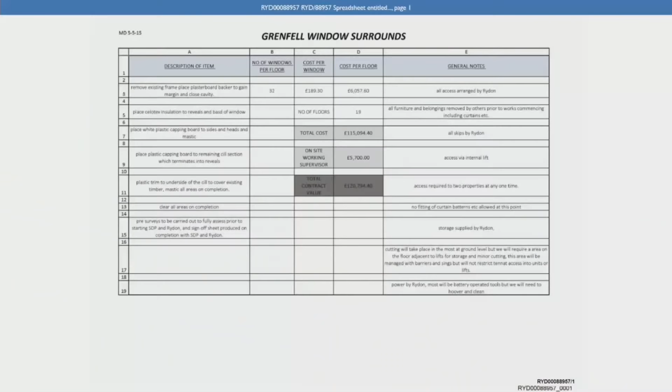Yeah, and we can see on the left-hand side, there's a column for description of item. And if we look, the first item is remove existing frame. So is that remove the existing wooden window frame?

I think it was the inner frames. I think, if I remember rightly, the windows were built out as you had an outer aluminium frame, and inside of that were two other windows that sit in there. So you kind of dismantle the frame. Right, so I think, to my recollection, that part of the frame still remained. It was fixed in place, and that gave us something to actually fit the board up against the new window frame and the old window frame.

Yeah, I see. So it says there, remove existing frame, place plasterboard backer to gain margin. So what's that bit? At that point in time, this was when this was done. So this is 5th of May. Yeah, when this was done, I'm saying to them, I need the flexibility just in case I've got a different scenario. So I might cut pieces of plasterboard in to bridge the gap and put it on that, or we may go back to the insulation.

So I think that just gave me the flexibility to do one or the other.

I see. So you've written in that top box, place plasterboard backer to gain margin and close cavity. And then in the row below, row 5, you've got place Celotex insulation to reveals, and should that be base of window? It should be, yes.

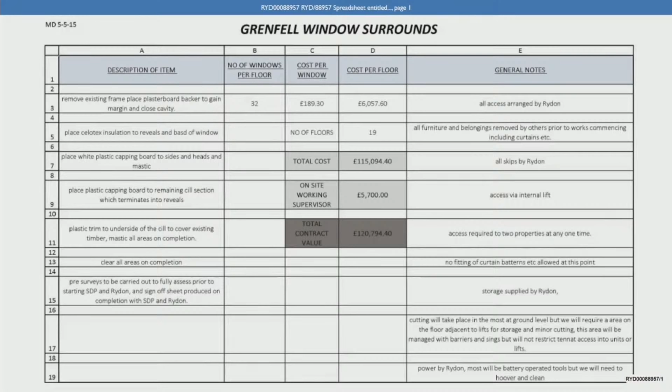So are you saying that what you were proposing in this quote was either one of those options, either plasterboard or Celotex, or are you saying that it was both? No, I think it gave me the flexibility to move in and about either one of those options. As it was then, we didn't use the plasterboard at all.

And the original sample never used the plasterboard. And I think actually in my statement that was offered as well, it's highlighted in there that comment there should have been taken out of the second quote. Yes, I was going to come to that later. Yep, so I understand that.

But just thinking back to when you put this quote together, were you contemplating that you might use plasterboard backer and some Celotex insulation, or a combination of both? Yeah, yeah, yeah.

And we can see you've placed Celotex insulation there. What Celotex insulation did you have in mind when you wrote this? It was no more than a 25mm Celotex. It was more to do with the thickness. We only had a very small margin to work with to actually be able to place something in there.

And it was there, the Celotex was there, because it could be put under compression, but it could also act as a support, as well as giving some sort of thermal benefit as well.

I see, yeah. So would there have been a particular Celotex product that had the right thickness that you had in mind? The 25mm, yes. I think it's a TP10, or it was a very basic one. Its criteria was nothing more than for us to have a backing into the board to stop this bowing.

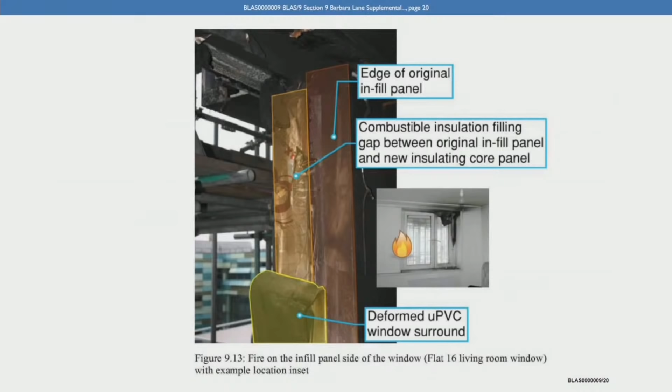It's got red branding on it, and you can just see the end of the Celotex there. That insulation has been used to fill the gap between the original window infill panel and the new window infill panel. Do you see that there? It's there to provide support to the plastic. And we can see that what's at the bottom in yellow is a deformed UPVC window surround, which has just peeled back and melted and fallen away, showing the board behind. Is that correct? Yes. And that was work that your operatives did on site, wasn't it? It was, yes.

We can see another picture of this if we go to Mr. Hyett's Phase 2 report. This is PHYR0000029 at page 20, and I want to look at figures 4.11 and 4.12. So I think we're looking at the other side of that window arrangement, back down towards where the window infill panels are. We can see the new white window infill panel, can't we, in that gap? Do you see that there?

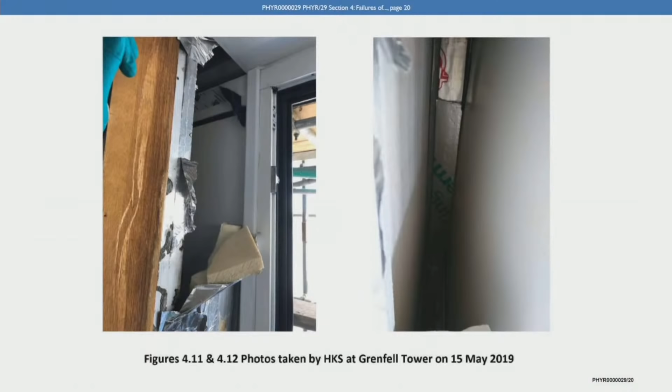And we can see that here some of the insulation and its foil facer has fallen away. And then if we look on the right-hand picture, is it right that here we can see an example of Celotex and Kingspan being used in the same location? Is that correct? Yes. Because we've got the Thermapitch, the Kingspan Thermapitch on the bottom with the green, and the Celotex on the top with the red. And you're looking at the rear of that. Yep. And again, that's work that your operatives would have done to put those boards in place.

And were they under compression when they were going in at that location on the sides of the windows? Do you cut the insulation so it's too big and then squeeze it into that gap? Yeah, it doesn't have to be precise because it will as long as it's got connection at some point. Originally, it could have been that we didn't fill the whole of that, we just used blocks of it to support it. But it was easier to put this in, and also it actually assisted with the thermal performance.

And is it right that the insulation was stuck to the underside of the UPVC? Was there an adhesive used? The UPVC was stuck to the insulation, yes. So on site, you'd put the adhesive onto the UPVC, would you, and then put it in? And it would just stick to the boards? Yes. Yeah, that's helpful. Let's look at the window head next.

If we can go to BLAS0000009 at page 6, and I want to look at figure 9.3.

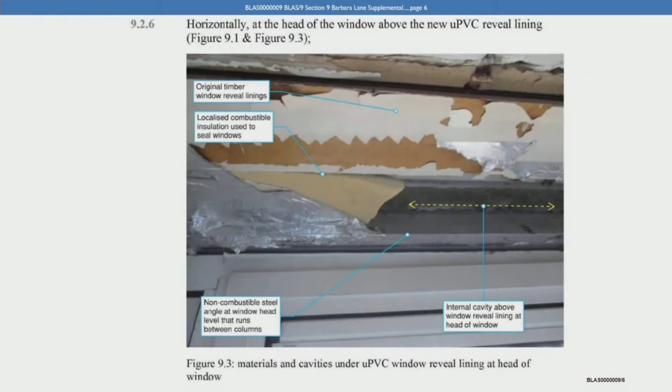So if we can zoom in there. I think what we're seeing here at the top of the page is the original timber window reveal linings, which were left in place. Is that correct? Yep. And then because the windows have been moved out, we've then got a gap at the head. And it's in that location, is that right, that the insulation has been compressed and pushed into that gap to support the rear of the plastic board? Yeah. So the gap didn't go all the way across. You had some support from the original timber window reveals.

Correct, yeah, but you had gaps beyond that. Which means, and where this came about, was the fact that on the lower sill section, if you didn't try and fill in the back with some rigid material, you were going to be able to push them down, and that was the concern. And just to be absolutely clear, that was work at the head of the window that SD Plastering did, yes? Yes, because it also shows the steel angle above, which appeared above and below the windows, which was fitted by Harley. And Dr. Lane has helpfully labelled that non-combustible steel angle at the window head that runs all the way along. Is that correct? It certainly looks that way.

And then let's look at, staying with the jamb, I think, if we can look at another Dr. Lane photograph. This is BLAS0000009 at page 13, and I want to look at figure 9.9. Now here, am I right that what we're seeing is the interface between the side of the window and the columns? Yes. And we can see the black EPDM membrane that's been applied by Harley for waterproofing purposes, yes? Mm-hmm, yep.

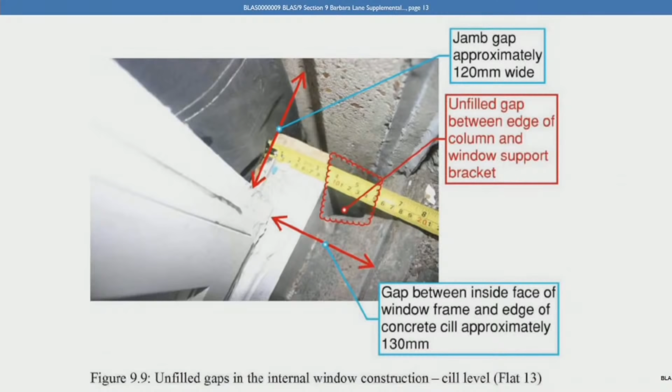And then there's a gap that's been measured here. This one is approximately 120 millimetres, but we know that gap varied up the tower. Were you aware of that at the time? It did vary, yeah. I think I even put that in my statement that it varied. And then at the bottom of the page, she's highlighted the gap between the inside face of the window frame and the edge of the concrete sill. We can see that there. And that's because the original concrete tapered off, didn't it? It did, away from the windows and below it.

So we've got this gap in that location. And is that the gap where you applied the insulation board? Yes, but it wouldn't have filled that gap at that angle. It would have filled the gap straight across. Exactly, it would have, in fact, what it would have done is just close that gap off. So there'd still be a void underneath it, a triangle-shaped void, but you're capping off the top before putting the UPVC on top. That gap there that she's highlighted in red, the unfilled gap between the edge of the column and the window support bracket, was anything ever done in that gap there? Not to my knowledge.

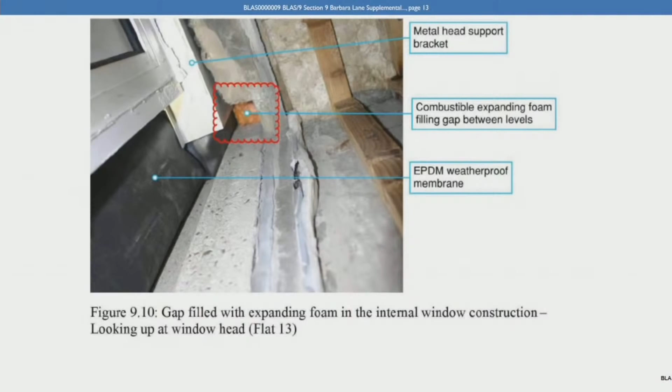Now, if we can look at, on the same page, figure 9.10. Yes, so there I think we're looking up to the head of the window. We've looked down and now we're looking up. Is that right? I believe that's showing you the reveal on the right-hand side and the head. Yeah, and this is helpful because we can see the old timber window frames. Is that right, on the right-hand side? I think you can see a batten there, yeah.

And then at the sill, if we look finally at the sill position, if we can go to BLAS/9 at page 5 and look at figure 9.2. So if we could zoom in on that a little bit more. So here we can see the sill position. Starting at the very bottom, we can see the original timber battens, and then we can see the original concrete window sill. Is that correct? Yes. And beyond it, that's where we then get the void where the concrete slopes off before the new window. Is that right? Yes. And is it that bit that was marked in yellow that was the bit that was bowing when you looked at the sample? Correct. Yes, it was.

And again, we can see the black EPDM membrane down the side. And just to be clear, did your operatives place insulation board in that gap that's marked with yellow? Yes. I believe it actually came across the top of that gap and then was wedged in up against what this doesn't show - if I remember rightly, there was an existing timber surround, which looks like it's been removed in this photo. So I think it was actually between the rear of that existing timber frame and the existing window frame, that's where the compression happened. I see. We can see a little channel at the bottom. Is that maybe where that timber has been removed? I think there's probably a batten missing somewhere through here as well, and it sat on top of that and was fixed and came out. Yeah, I see.

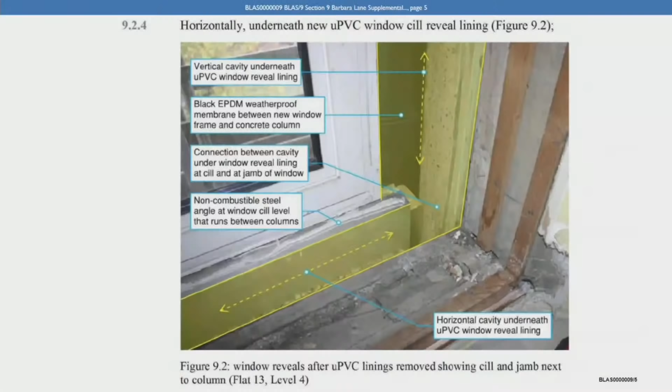Now, can we turn to something that was known as the NBS specification on the project? This is SEA 50169.

This was prepared by Studio E architects on the Grenfell project. It's called the NBS specification. It formed part of the employer's requirements in Rydon's contract.

Can you recall ever seeing any extracts from the NBS specification when you did your work? It may have been more towards the dry lining, not in line with this. So we may have had the extracted pages that form part of the dry lining package. It may have even been the whole document, but if it had been, we would have only focused on the elements associated with dry lining.

If you had those elements that related to the dry lining package, did it ever occur to you to ask, can we see anything in the NBS specification that relates to the window surrounds? No, I think we were one of the last people to cost this element of works. There'd been many before us. You'd like to think that there'd been a series of processes that had gone through, and what we were being exposed to was the remaining option.

So does that mean, in your view, that the window surrounds were an afterthought on this project? I think reading back through the emails, remembering that the original ones were a birch surround, which appeared, and then a saving was taken and everything else, and that they were afterthought. I think they were a VE option that were designed into it.

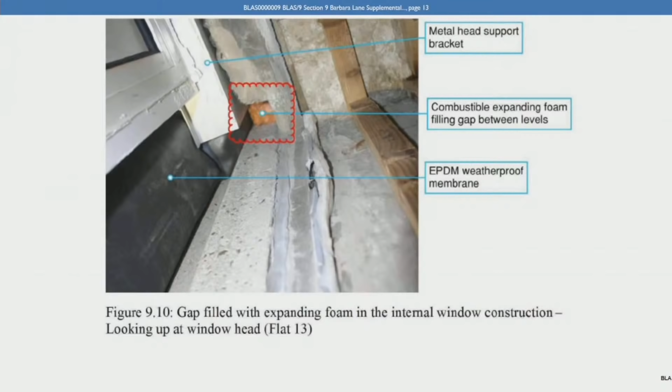Can you help us as to whether or not that was something that SDP did? I don't believe that's anything to do with our works - there was no point to us putting that in. I'm assuming at some point it was to fill the gap between the frame and the window, or done from the outside rather than the inside. Right.

So just to be clear, to your knowledge, there wasn't any form of expanding foam used by SDP installers? Not to my knowledge.

Now, I just want to look now at your statement to the Met Police. This is MET 3056695, your main statement given to the police. At the bottom of page 1, you say SDP is an experienced construction company providing various works, and then you also say compartmentation, fireproofing and property development.

I do. And if we also look at the top of page 4 of this statement, you say compartmentation refers to subdividing areas and what that compartment needs to achieve. This can vary from sound to fire resistance and water resistance, etc. With regards to the work carried out by SDP at Grenfell Tower, the compartmentation was determined and directed as per the architect's drawings provided by Rydon.

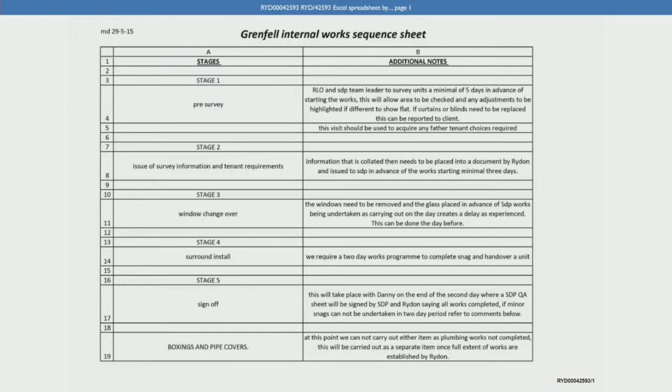Is that right? Yes. Now, at stage 5 of the work there, on the left-hand column, we can see stage 5 sign-off. And then if we read on the right, it says this will take place with Danny on the end of the second day, where an SDP QA sheet will be signed by SDP and Rydon saying all work's completed. If minor snags cannot be undertaken in the 2-day period, refer to comments below. Do you see that there?

Yes. Now, was that procedure actually followed on site? In the most, as I say from the email previously, is that they fell behind slightly doing some of those final inspections and sign-offs, but Andy would produce his QA sheets, hand them to them and say, is there any further comments and are there any snags? And I think during the whole process, we were probably emailed perhaps 2 or 3 times to say, can you go back and rectify this bit here, or can you do that?

Now, it's right, isn't it, that Rydon did raise a number of concerns about SDP's workmanship on site? I'm aware of a couple. If we can look at an example, if we look at RYD 55835, and I want to look at the bottom of page 1 and on to page 2.

Right at the bottom of that page, on the 28th of October 2015, at 16:33, we can see Chris Holt has written to Andy. And then if we go over the page and see what he says next, he says, as per our conversation earlier today, I've checked the window trims in flat 53 fitted today, and there are several issues that need addressing. Top trim in middle bedroom needs redoing. In the living room, bottom trims along the windows are not straight, and excess mastic left on the trims in the living room. And then at the end of that email, he says, this is not good workmanship, and I have been told by the tenant that the operatives have tried to rush through the job, and therefore we have this result. Could you organise for this to be rectified next week?

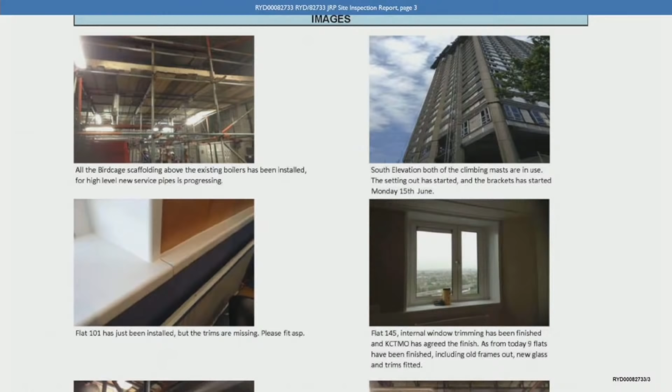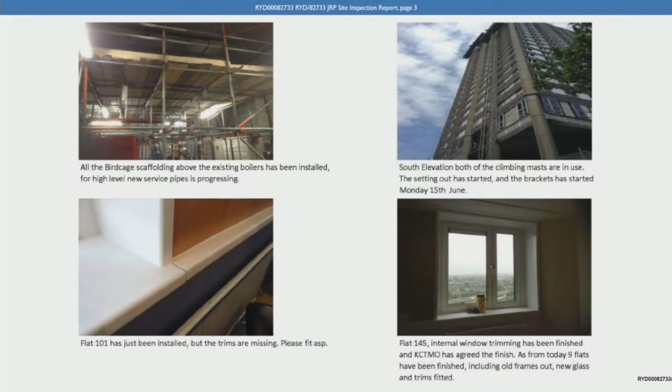Yes, we can see on the right-hand side, in his report, he said: flat 145, internal window trimming has been finished and KCTMO has agreed the finish. As from today, 9 flats have been finished, including old frames out, new glass and trims fitted. Do you see that there? I do. Now, do you know what he means by KCTMO has agreed the finish?

What would that mean? It's not the Kensington Chelsea TMO? Yes, but I mean, does that mean anything to you as to whether anyone from the TMO was agreeing the finishes of the window surrounds? Oh yeah, but I don't know who that refers to specifically, but that indicates to me that he's shown more individuals, and that's the show flat as well, 145.

Were you aware of any TMO employees, individuals inspecting the window surrounds? No. So far as you were aware, did RBKC Building Control ever see the work to the window surrounds as it progressed? Yes, as Andy's statement, they saw them on a regular basis, whether that be once or twice a week, and we would have been at both stages at any one day.

So one day you'd have had the inner frames exposed, the second day you'd have seen the plastic on. But I'm talking now not about the Clerk of Works, about RBKC Building Control officers or inspectors. No, I don't know. You don't know? No, I don't know.

So you can't help us as to whether or not Building Control did ever go in and see the window surrounds, including what was underneath and the UPVC? No, I'm not even sure I'd known who it was from Building Control that came to site.